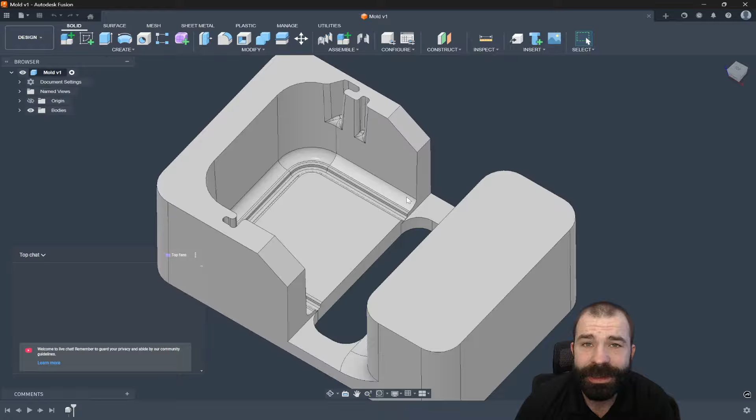The first request has come through from one of our common viewers: how would you approach some of the deep pockets on a part like this? Obviously the easiest way to approach these parts is, one, don't take jobs like this. However, if you do take a job like this, this is why we're here, guys.

I'm going to jump over to my manufacture workspace. We're going to throw in our setup as always - I'm going to do milling. From there you can see we have our lovely block. As you guys know, we always like to go with a fixed size block here when manufacturing something, with a little offset from the top. It's looking like this material is super close to size here.

We might actually make that a little thicker as well - let's say it's coming out of a 1.25 inch block, right? We need to remove the mm because we are working in inch, not millimeters, I assume. And then let's get some roughing tool paths on our part.

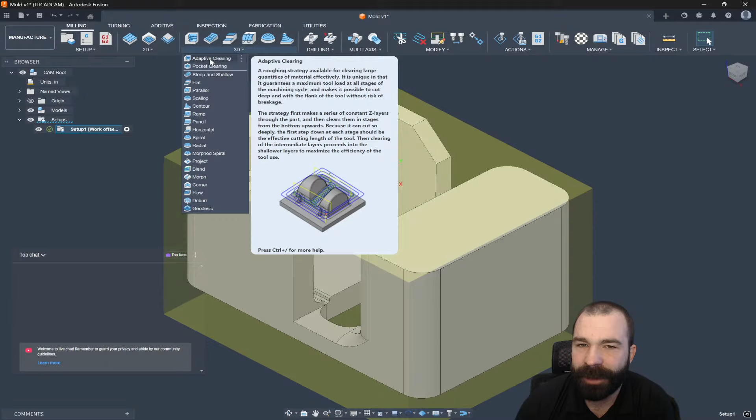If you guys haven't caught our content before, we usually want to always go for 3D roughing. So I'm going to do the smart thing, which I fail to do in most cases - I need a size of something to get an idea of scale. As you can see, that's a 300 radius. We might want to start out with pocket clearing in something like a 1-inch insert mill.

Now I don't have a 1-inch insert mill by default, but I do have a 1-inch bull end mill that can do quite a bit of damage. So let's grab our bull end mill. As you can see, that's actually a little giant now, so again, perspective-wise I'm way off today.

Let's step that down - let's go back into our default library, back to a bull end mill at a 1/2 inch. And for those of you that have never seen this before, we could pick speeds and feeds on the fly.

I'm going to go ahead and call this aluminum roughing. Then we can get our slotting information. As always, we have a maximum roughing step down. Probably want to be a little less than that, a little more friendly on the tool. And what we're really looking for is to be able to rough out our part.

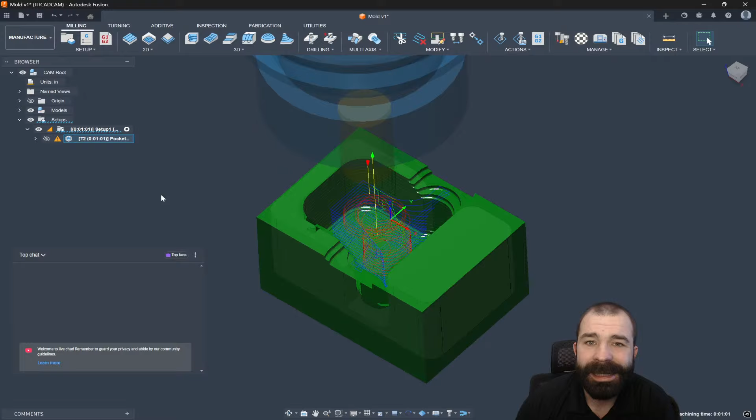If you've never seen my content, I'm a true believer of hitting the OK button, getting blue lines on the part, and then determining what is wrong with those blue lines. Just so happens in this case, we go to our geometry tab. The problem is our tool needs to have no boundary so that the tool starts all the way outside of our part and works its way in, just as you guys can see.

Now we are getting a couple of things here, and I'm glad we actually got this part in this tool size. As you guys can see, this gap is too small for that tool to fit through. If I measure this flat to flat here, it's a 460 gap between those two. So that 1/2 inch tool just is not going to clear through there.

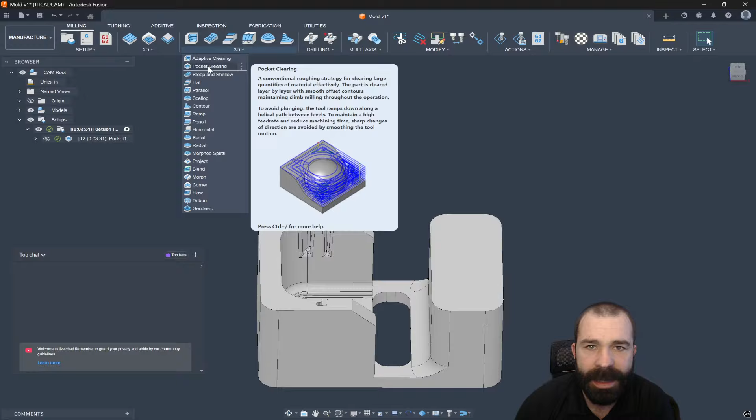This is where I might approach now bringing in a secondary toolpath. Maybe it's adaptive clearing, maybe it's pocket clearing. But what I'm looking to do is step down my cutter size. Let's get down into like a 3/8. Again, I'm going to stick with the bull end mill. And where's my 3/8 cutter? From that 3/8 cutter, we're going to have our rest machining utilized to our advantage.

This is what I'm going to show you guys here in a second, when you're stepping down in tools and using rest machining. Go ahead and change my optimal load. We are doing adaptive. Let's do this the smart way, guys. We're going to go ahead and do reset user default. There we go. So it looks like when I derived it, it pulled through a speed and feed I didn't need, but we're going to let this calculate out.

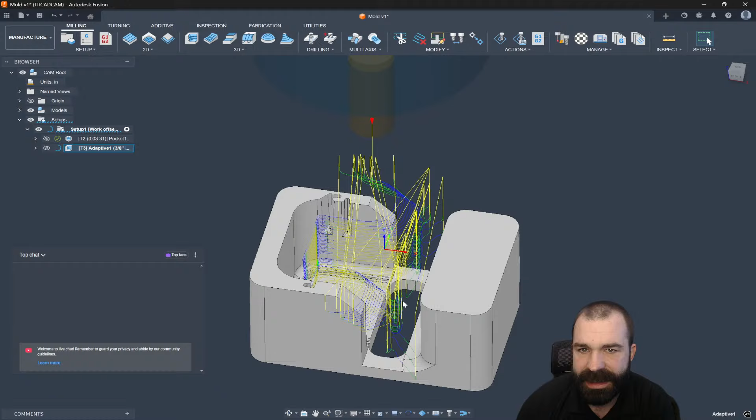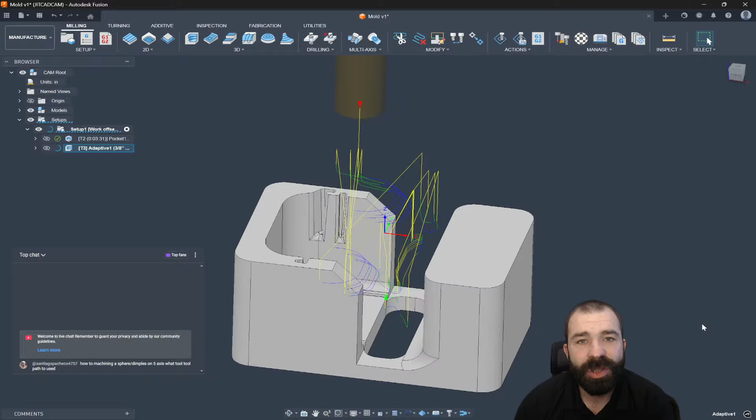Now you're going to see we're probably going to get a ton of extra passes that we necessarily did not want. The reason for that can be based on our continuous rest machining. Again, ignore stock less than - this is important. I always like to make this number larger than whatever my stock to leave is prior to. My stock to leave is usually based on a 20 thou stock to leave scenario. I'm going 0.025 there, and as you guys are seeing, we're seeing a little bit of reduction in toolpath. We're also jumping back and forth across the part quite a bit.

But I do see our first question coming in. Santiago says, how to machine a sphere/dimple on a 5-axis? What tool and toolpath is used? So what I'll need on your end, can you send me, in theory, a dimpled part? And then from there, I would be happy to apply toolpaths. If you need me to, I can always create one. But I want to prospectively see what it is you're trying to do, because before I show it, I could just drill them, use a drill toolpath and a ball end mill if need be.

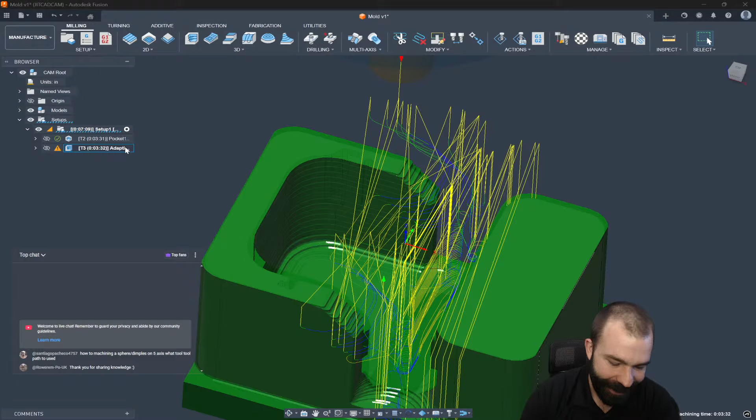Now you can see I can see my stock a little bit better, and there could be more stuff that I need to do. The reason why I'm taking a lot of you down this path is because at some point, I'm either going to finish my walls with a bigger tool, then I'm going to start to worry about getting into these smaller pockets. Now I'm going to cheat the system a little bit, we're going to kind of look at doing some of these pockets. So I'm going to inspect this. As you guys can see, we're getting a loop length.

Again, there's probably taper on this part. I don't know where this part comes from. So I'm going to go ahead and grab the edge. And now we're dealing with a 20 thou radius or a 0.041 diameter.

Now, this is where things get extremely tricky, extremely quick, but it still always kind of comes back to the same thing. If I come in here using pocket clearing, I'm going to go down to a really tiny tool. I don't think I have anything that small off the top of my head. Let's go into our cutter here. The real problem we're going to face is dealing with a very small tool in a very small area.

Let's say 0.03125, and we have a 5 thou corner radius. Again, a tiny tool, and that tiny tool is what we're going to use to get our tool path on our part.

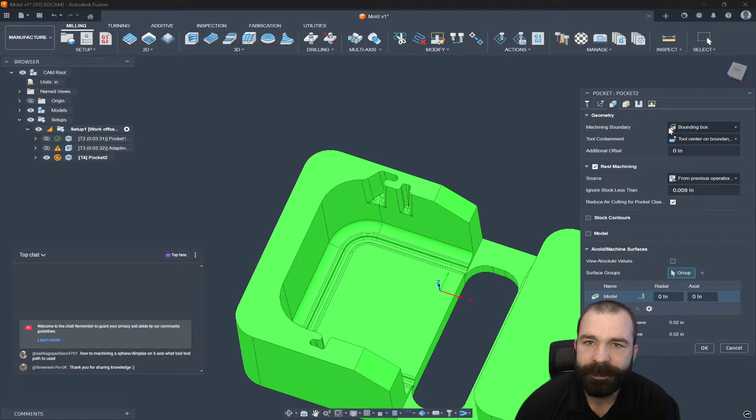And now what I am going to do on this one is select the boundary, because I'd like the tool path to only stay within a certain region, right? So again, this is where I'm using that boundary selection. Tool center is fine. Really what I'm looking to do is just get a path to start to show why and how what we were doing, and what's going to happen. But this is where we're going to run into our first dilemma, right?

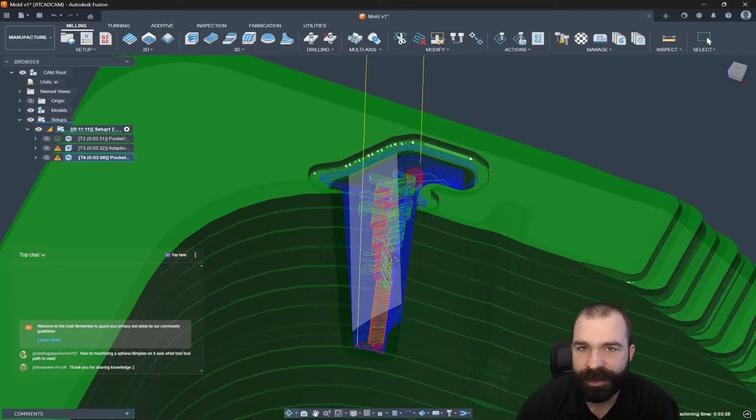So this is a roughing strategy. Again, we have stock to leave currently turned on. However, stock to leave based on 20 thou for a 30 thou tool is unrealistic. So we'll bump that out to about 3 thou. And as you're going to see, we're going to get a much larger tool path, roughing out the inside of that pocket. Now, again, I haven't rest machined a bunch.

I didn't get a lot of tool paths on this to get it down to a finished position. That's why you're seeing that we're kind of starting outside the part. The boundaries look a little weird for the roughing. But as you guys can see, I am now roughing out a very, very large pocket. That was my end goal at the end of the day.

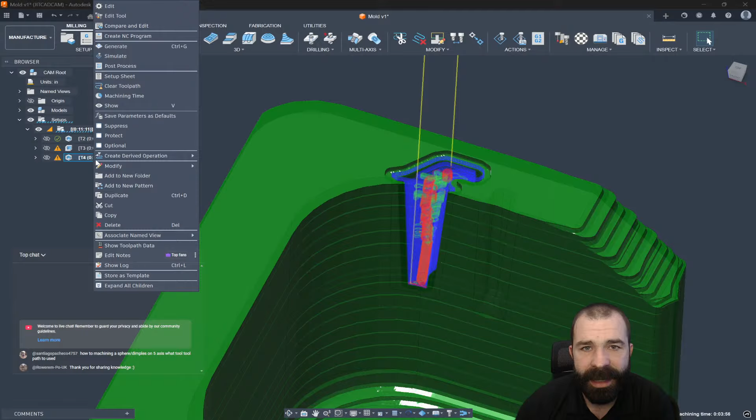And since I have that, I can now quickly pivot into something like a contour toolpath. So again, if I'm looking to do this with 3D toolpaths, this is a mold, I would highly recommend being in the 3D workspace. But what we're looking for, again, we have a maximum step down, maybe that's going to be smaller based on what we're doing. Again, we don't need stock to leave now because this is a finishing strategy.

The real problem we are going to face at the end of the day on this part is the fact that no matter how hard you try, this tool is going to have to stick out a mile. That's all there is to it, right? So a few tricks now that I'll show you guys is setting up tools for these situations.

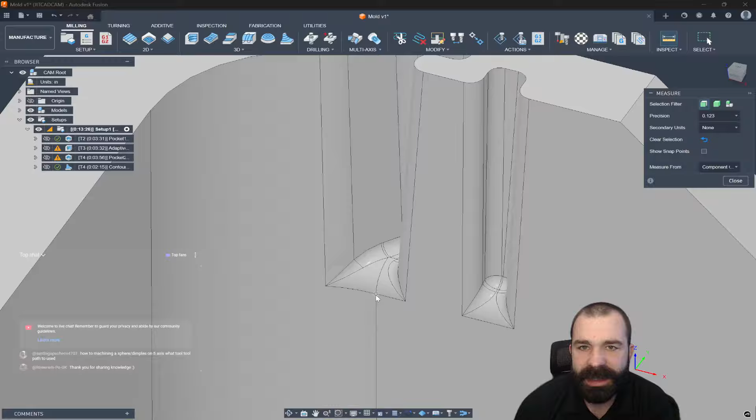So what I'm going to do is start off with an inspect, because I need to know the rough length that I need of a stick out of my tool. So we need to be about a 1/2 inch stick out. Again, guys, I understand that's like a mile of stick out, but let's go in and we're going to edit our tool.

We're going to go to our cutter. And in this case, we're going to say the shoulder length is about 0.5, which means your flute length, if you're using more of a die making tool, is probably only about 50 thou. And as you're seeing here, I still have an overall length of 1.5 inches, which is massive.

We also have our length stick out below holder. This is where I might actually use a reduced shank holder. So again, if I go into shaft, I can add in a couple of segments for that shaft. Again, you have your upper diameter, lower diameter, and we could start to build out our tool.

So for example, I may want this to taper down to a 0.1. And as you guys can see, by adding that information in, I have now created a tapered style holder. Again, I'm going to add a few more here because we do need that to be possibly much larger. We're going to go ahead and actually do 0.5. Let's say we want... trying to come up with numbers off the top of my head, guys. As you guys can see, we can change that up.

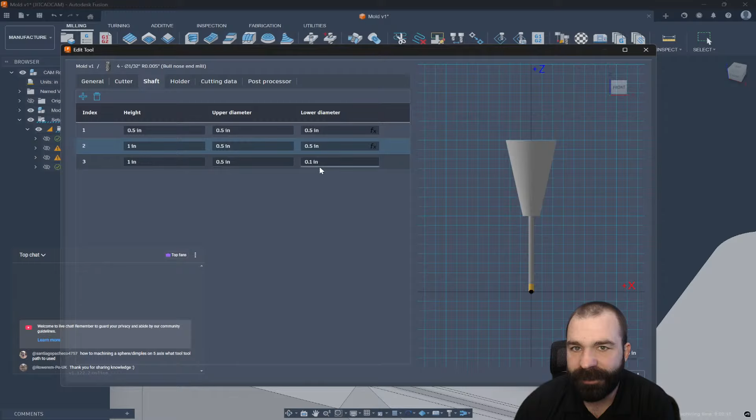Again, we want our upper size here. Let's say it's going to be about 1 inch long. Now, the reason why I'm not getting more information out of this tool yet is because I still need to go back to the side of the cutter. And then we may want to change things like our length below holder to close to 0.75.

And as you see, we have our tool holder. We could also change our tool length as well. Let's get this down to 1 inch. And we actually might have to increase this—it's been a while since I've had to build this out. But as you're seeing, go ahead and delete this guy. As I like to do at the end of the day, sometimes plugging in obnoxious numbers tends to help. As you can see, we also have tool holders that we can grab as well, which we are missing. So let's go ahead and put one on here.

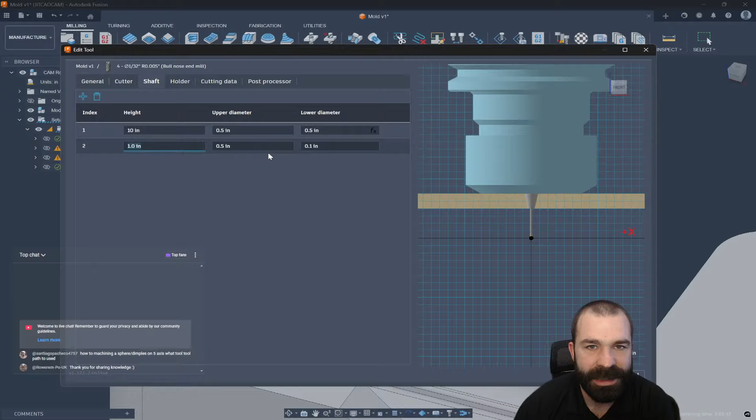But from that, what I'm looking to do is build that shaft out. Again, we have our upper, our lower, length 10 inches, 1 inch here, which for some reason I'm not getting the actual full shaft and holder that I'm looking for. So give me a few more seconds. I think, you know what—now thinking about it, I have to change stick out length, and that is the case. So even the best of us have a little bit of a problem from time to time.

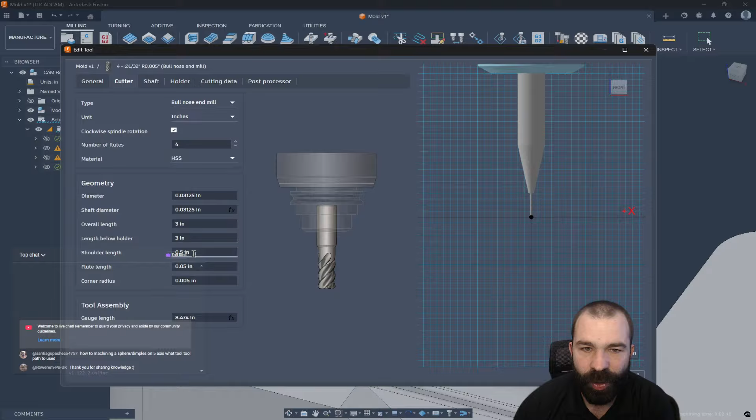So your stick out length does control basically, or your length below holder does control, both that tapered extension. I'm going to go ahead and change my extension a little bit here. Let's get it just a little smaller in diameter. I think we're going to run into problems later regardless. But just like that, we've now created an extended tool with a tapered shank kind of holder, making it a lot more realistic for what you're machining or what you're doing at the end of the day. Again, avoiding those collisions and damaging the tool.

Now give me a sec here, guys. I do see, well, that we can't show on—so I just got a notification from one of my other customers for some support, but it's not an emergency.

So again, what you guys are looking at is getting down in those deep pockets can be a pain, especially with a very long reach stick out tool. This is where you may want to use a couple of tools to get down there. Again, you could break this down by Z heights.

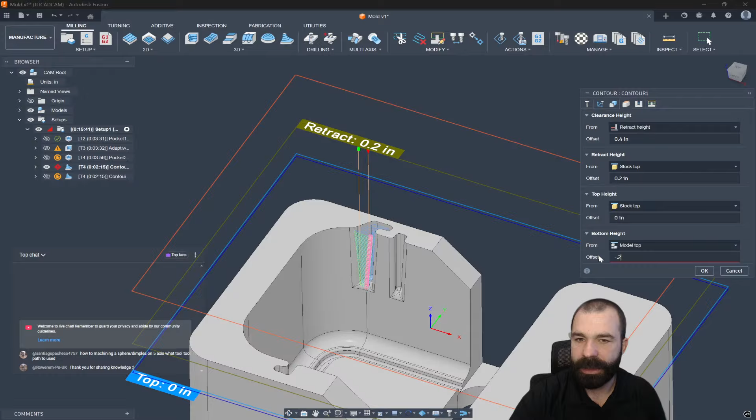So if I was to go in, utilize the same tool path, I'm going to duplicate it. And let's say, for example, I only want to get down to a bottom height. We're going to go ahead and we're going to reference this instead of model bottom—maybe I go model top minus 0.2. And now the first 200 I'm going to do with a different tool. Yes, I didn't select that tool yet, guys, I'm just showing you. The neat thing is we can go through and we can break this down using our Z height control. Again, this is going to be based on model top minus 200.

And then from there, our next little pocket and cavity deeper, and we could also go through and start to add in additional areas. Usually what I tell most people is you want to use the rest machining as much as possible to your advantage. I know I'm just changing out the stock or the finishing toolpath, but the rule still applies, right? So again, I go in, I add an additional pocket here in this case so that we can see more and more areas. Same thing would happen with that lower pocket at the very bottom of our part.

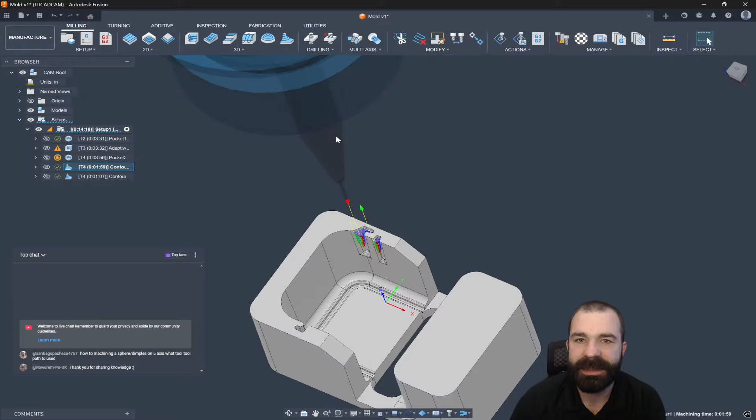This is where having something like an extension or a custom ground kind of tool is going to make all the difference. Because if I was to use this tool right now and do the same thing, I might go for something like steep and shallow. That's up to you guys. Geodesic could be extremely handy down there at the bottom of this pocket as well.

But as you're going to see, let's say we're going to go steep and shallow. And the reason why I say geodesic is geodesic has blend, a little better strategy at the end of the day. So again, we select our boundary to go ahead and grab the edge over here, extend it up, round, and then we want to go inwards. As you guys can see, we're coming all the way around to the other side of our pocket. We're not quite coming all the way down and around, but with a simple addition of a chain, we are now.

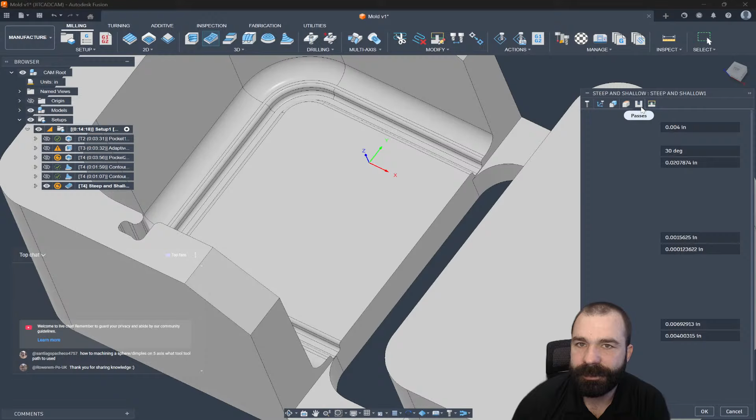Again, utilizing our different settings for step over versus step down, contained inside that area, to be able to machine out something like that. As you're seeing, this is all going to come down to my simulation and what I can and cannot get away with.

Now, we could always up the ante here at some point and look at utilizing - again, what I'm looking to see here, my tool holder is not making contact, but I don't have my stock regenerated yet, which is why you guys are seeing these errors. What I'm really looking for is that stock or tool holder colliding with my final part, if there is any.

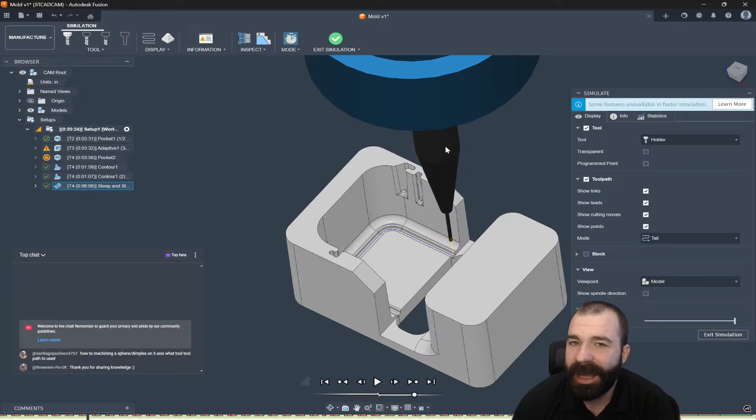But now we could try to start to add in some live 4-axis or 5-axis maneuvers if you have the ability to do it. But as you're seeing in a 3-axis environment, there's no good way to go about it. You're going to have to get some kind of extension in there, and utilize machine simulation as well as clearance checking just to make sure there is no problem.

Again, I'm regenerating some stuff on my side just to see if we can't get that stock model to come through, so that when we go back and simulate our steep and shallow, we're not getting any collision. So what do you guys think?

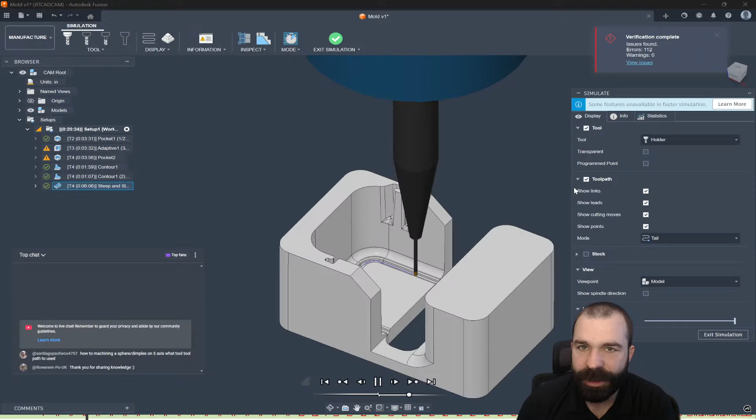Is this something that works for you? Does this kind of explain and show that series of events?

Again, I should have roughed this out, or in this case, as you guys are seeing, I am making a collision between my holder and my stock right now because we never finished up our walls. So again, it doesn't really matter the order at which you do stuff in Fusion, because you can always go back and add new toolpaths and change things up.

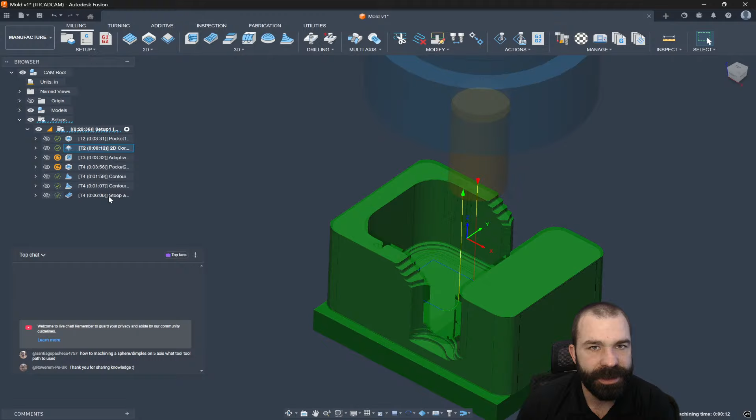So if I came back in here with our half-inch cutter, go ahead and use contour selection around the inside profile here - I'm also taking a chance that this might actually be a vertical wall. And then we're going to reorder that back up to the top, because again, keeping our same tool numbers together if need be, just so we can get good results. And then again, we'll have to recalculate a few things.

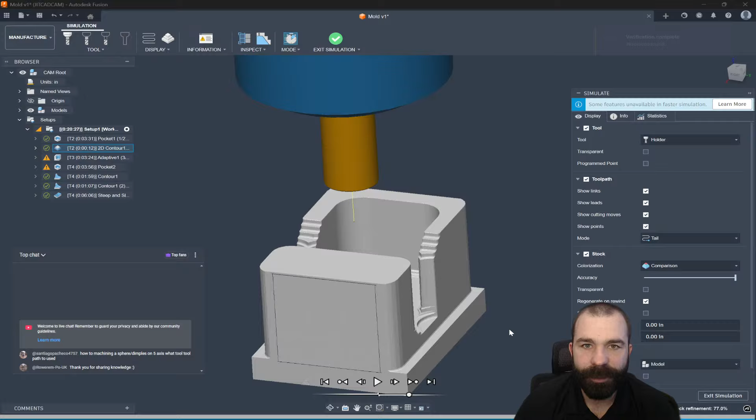Now we could crank our accuracy up, give her one more go. And it looks like those walls are tapered. So I would need to use a little different strategy.

And if that's the case, this is where I might look at utilizing - again, instead of 2D contour inside of there, maybe doing something like 3D contour around the entire part, based on using our biggest tool possible anytime it's possible. And we'll go ahead and say tool all the way to the outside boundary, and get a path on the part and get her reordered.

Again, we'll go ahead and let this calculate out. I'm going to simulate this just to see what we have this time. And we could always go back and add more stuff as we go.

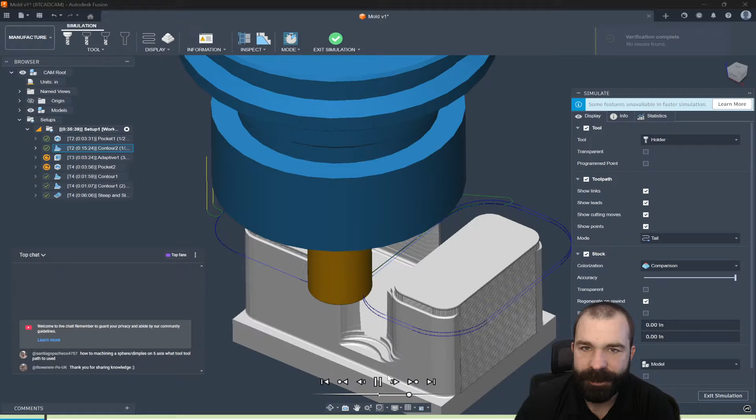Again, what I'm looking for is to knock that 20 thou material out of the way as much as I can - really looking to get the walls machined back to zero. We'll go ahead and pause here real quick so the software can calculate.

What you're seeing here is a heavy step down in our cusp heights, as well as a corner that still requires some cleanup at the end of the day. So again, this is something that's different for each and everybody.

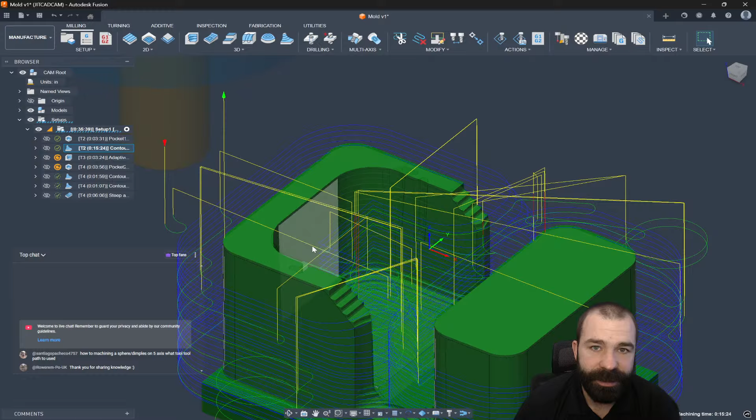If you have the ability to utilize a machine that has 5-axis, this is where we could talk about doing something maybe with swarf throughout these walls here. Again, a lot of different things we could do at the end of the day to make this part much more efficient - 2D contour, maybe we go out.

We could still stay with that ball end mill. I would assume this is like a slide to go in a mold, so the outside walls at the end of the day should have been vertical as far as I know. And again, this is where you pick and choose your battles - if I do 2D contour around the outside of the part, we can use the fast GPU simulation here just to see, is it going to finish up those walls?

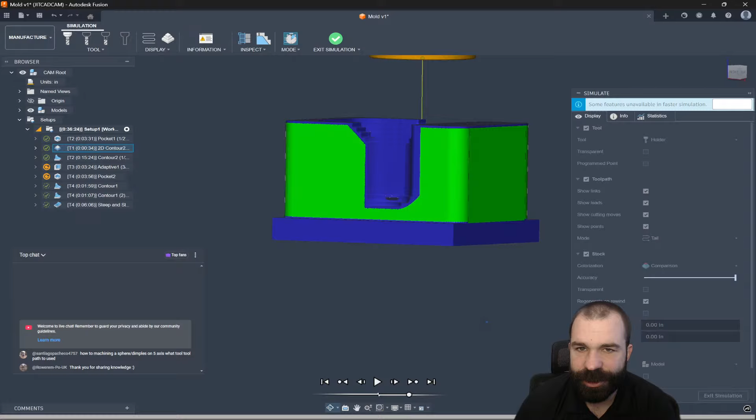Give her a sec here. Wrong tool, but we might get the right results, which is, yes, those walls are all vertical.

So again, we go into our contour. Based on our contour, we could actually use rest machining again, and let it do its thing and self-trim, possibly remove areas that are needed. This is the fun of just about any CAM software—we play that game of, you know, we could actually ignore stock less than a certain value. This is one of those things where we need a number that exceeds the settings in our other toolpaths, meaning you have to account for tolerance in a toolpath as well with those stock to leaves.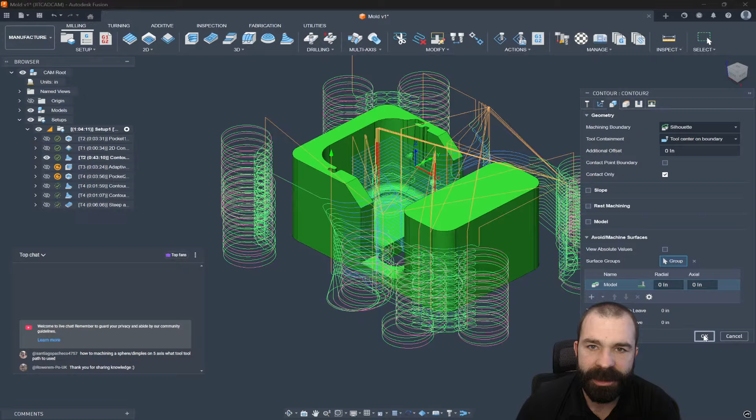As you guys are seeing, we went ahead and made some changes. It still thinks there's material on the outside corners. In this case, we could actually start back at the top where we should have started—we want our tool to be based on a silhouette of our part. Maybe we want the tool to actually start centered on that area. Again, you could see we could reduce down where we're going. So there's lots of little neat tips and tricks.

We need maybe a flat strategy in here as well—3D milling. We're going to go ahead and hit this with flat, clean up our floors and our walls without wasting the time of getting a tool out, maybe a 2-inch shell mill in that case, to clean up anything and everything else. So again, we have our flat strategy to clean up our floors, utilizing contour to get inside there. Just spitballing some ideas.

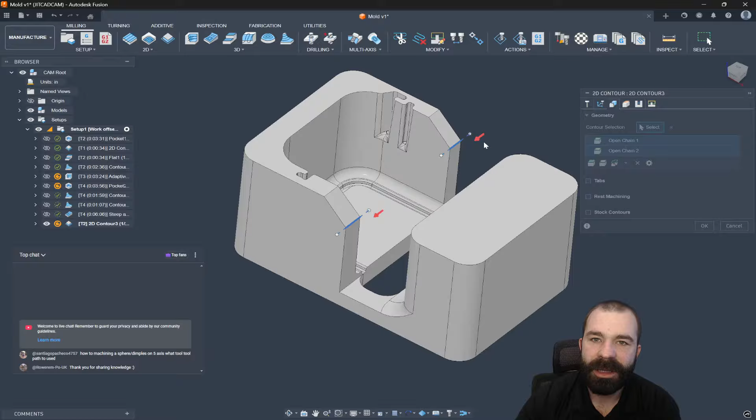We are going to run this part on a 5-axis. We can now go in and utilize something like our tool orientation—Z off of this edge, Z up, and then I could go through and pick these 2 lower rails. Then what I want to do is highlight both of those holding control, right-click align, and give them a little bit of an extension so at the end of the day we're not starting our cut and exiting our cut directly on our part. As you guys can see, just some more stuff added into this as we cycle down and through.

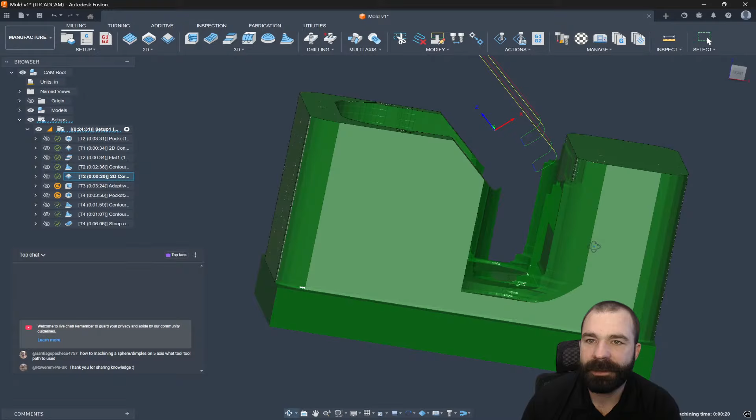Again, this is a ball end mill. I may need to shift my Z—pretty easy to do once I can actually see whatever that toolpath has, or whatever I'm looking to program on that part. Again, making sure I'm not colliding with the backside.

So this is your guys' chance. I'm going to go ahead and check the old ticket system real quick and make sure that nobody has submitted anything else. I don't want to call this early, but I may have to call this early. Looks like my other customer solved their own problem, so we are all good there. Let's go ahead and resolve that ticket.

Any other questions out there? I see you guys, I see you guys out there hanging out. Anybody have anything in particular? Any major problems on their parts? Anything that they want to see?

Again, I'm going to go ahead and start forcing the rest machining to come through. Previous operations, we've trimmed down this toolpath to no longer be doing the stairs up at the top. We're only working around the inside area. We're not quite fully getting through this gap, so I might have to just go smaller, smaller, and smaller.

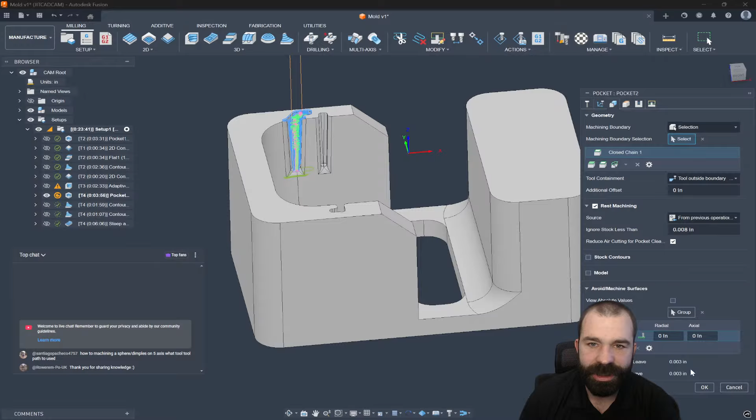However, in this case, when we do the pocket clearing for that little area, I could probably now start to say tool outside a boundary, from previous operations again, and we should actually see that trim down, allowing us to possibly start our tool outside the part. In this case, we're still getting helical entries, and we can extend that even further if need be. So again, this is just a couple of tricks that you can do to start to get that pushed out further.

As you're seeing, we're now going down and waterfalling the entire inside area. But this is why we have neat things like the ability to utilize avoid/machine surfaces if we wanted. You're seeing we're now getting into that other pocket, which is also nice.

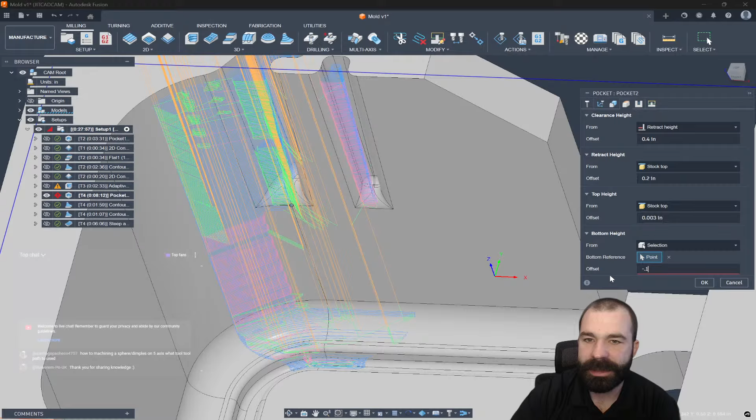So I might just say, don't touch any of this area and don't go deeper than a specific selected area, which would be here. And what you're seeing in the offset world is coming from my tool. So maybe I just want to go 0.10 or 0.01 past that lower area. So now I'm using a combination of different things to force the software not to touch or machine those areas. We still do have contact over here on our wall.

As you guys can see, we're no longer needing helical entries, maybe a little bit depending on where we are down here at the bottom. And we're getting in and out and roughing out those areas.

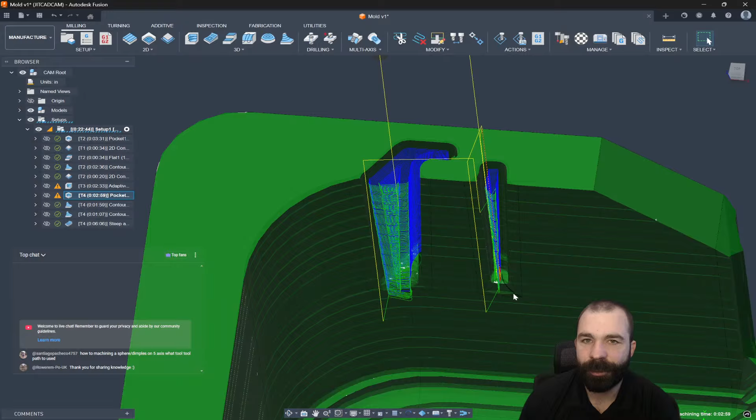Now this pocket here on the right is kind of nice, because in the event that we were looking at doing something with a 4th or 5 axis, this is where we could always come in with a traditional 3+2 mindset. And we'll say contour, for example.

Let's swap our tool out here real quick. I don't know if I have a ball end mill that small. We might have to manipulate a ball end mill. We do have a 1/32. Let's get back up into our normal tooling that we've already built.

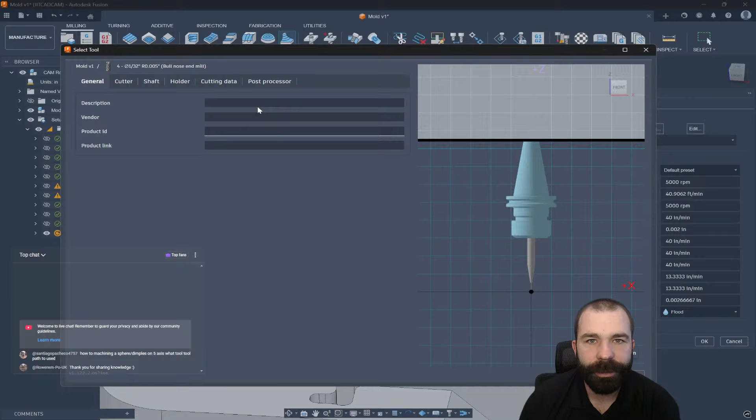And what I'm going to do is take this tool, we're going to go ahead and duplicate it, and then we're going to make it a tool that is a ball end mill, not a bull nose, right? So again, ball end mill, same kind of dimension, same kind of holder for the most part.

But if I'm looking at this part in a certain view, I just used my view cube to cheat here, and I turn on tool orientation, I can actually align to view. Now Z is pointed at me. So wherever my boundary is or selected.

So again, I'm going to go ahead and grab my boundary here, and tool center on boundary, yada yada yada, tool step down. Let's go ahead and go like 10 thou. But as you're seeing, I'm now angular running up and down that face, and I'm doing that based on nothing more than a tool orientation. So going to a fixed position and then still running in a 3-axis kind of environment.

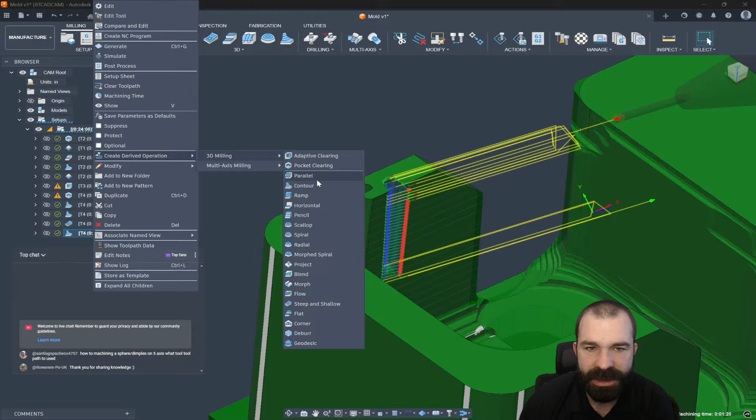Now you could do much more with this. If I was to actually convert this over into our steep and shallow toolpath, again you would need the machining extension you should buy from us over at ITCADCAM. But as you're going to see, we could now bump over to 5-axis.

Again, this is going to be full 5-axis simultaneous. We do have the ability to change our primary mode. We don't want to be vertical, we want to lead and lean this tool, again getting further and further down. Lead and lean basically means we are going to be perpendicular to the surface.

Now I can do additional things: tool axis limit, don't go past 90 degrees, machine at tilt limit, collision avoidance if you guys need it. Again, the idea here is to be able to utilize different tool paths and get different results based on what you can and cannot get away with.

So again, I might go steep only, step down 100 thou, and let's see what we get. This might be a good one for a scallop kind of tool path. And as you guys are seeing, we are getting a collision because we didn't have collision avoidance on. And because we're trying to stay perpendicular to the surface, this is where you have a lot of different settings inside of Fusion.

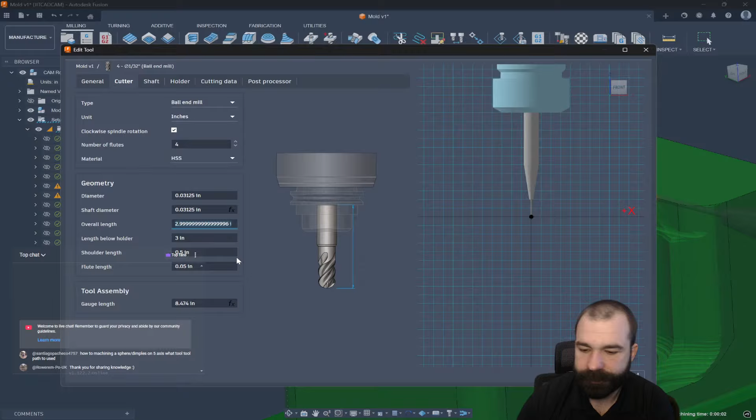However, when you start to stub up your tool a little bit, let me actually back up here because I need to change, not this guy. We need to say shaft and holder, overall length. Actually we might have to change our overall length and everything. Again, should be able to shrink that up a little bit, get it back inside the holder.

I think what we're looking for is, there it is, I was thinking correct. The shoulder length is what's getting us more than anything. So now we've shrank up to 300 stick out from the extension.

Let's go ahead and swap out our 5-axis back to what I would consider utilizing vertical, which means it's going to automatically tilt once it can no longer reach whatever it needs to reach, putting us into a 5-axis motion if need be. Now the problem is because we're pointed at this angle, it thinks it can reach everything.

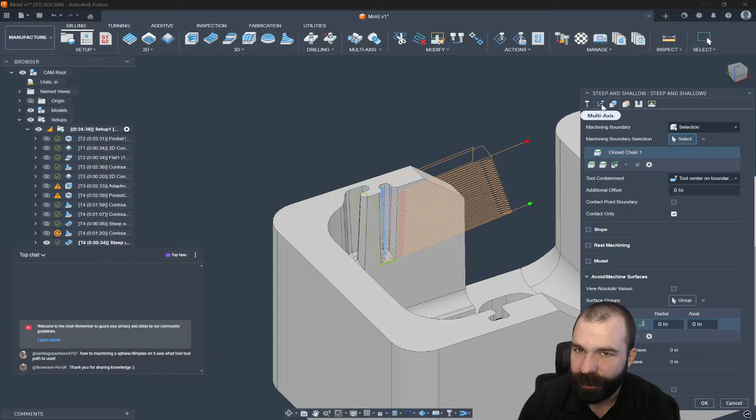But if we turn off tool orientation and then come back and run it again, at some point we will start to tilt in and out of that tool so that we can actually machine those areas. So I'm going to look at tool axis. As you guys see, the tool axis is still, for the most part, primarily vertical. But this is all based on the length of my tool and how I can reach.

Again, open to you guys, the floor is all yours. If you guys have any questions, any problems with that.

I'm going to go ahead and check my emails here real quick because it looks like Autodesk emailed me about something cool going on. Let's see here. Okay, that didn't really work very well for me.

Well guys, any other questions? I'm going to shift gears here in a minute if I don't see any more Fusion-related questions, because I know a lot of people have been bugging us and sending us messages on our website about our Oh Scrap shop management tool. So I think this is the time where I'm going to pivot over to the Oh Scrap tool.

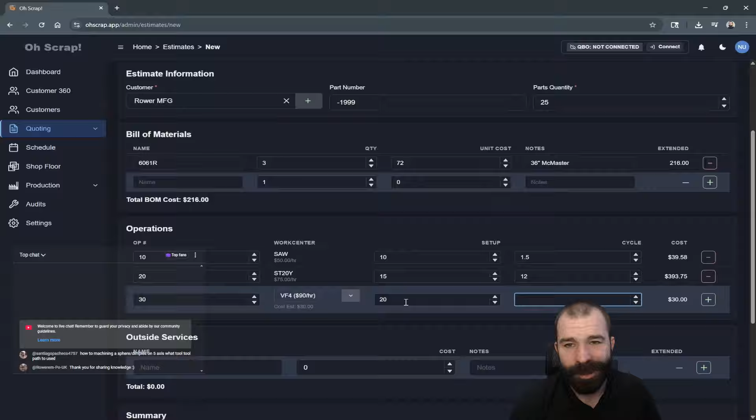Again, once we're done there, we'll throw it over to the VF4. Maybe it's going to take closer to 20 minutes setup. Now, when you're estimating setup, I don't know about you guys, I always used to estimate based on that there is nothing on the table, as if you got to put in vices and tram them up and everything. Again, we're going to say maybe it's a 15-minute cycle. Who knows, right? Whatever your information is, that is what we're plugging in here and rolling up the total costing.

To your customer. So again, the nice thing is if you will still manually want to go back to your customer and say something like, hey, to do 25 pieces, it's going to cost roughly $50 a piece, you have that freedom. But we're still going to want to save our estimate, because we're going to take this estimate, and like I said, the idea is you would have a lot of parts estimated to a customer, which means we can now come back by those line items.

As you guys are seeing, I'm building out that quote. Maybe you know the due date, maybe you don't, we're going to go ahead and push this out to the 28th. And then I can actually pull in those different estimated line items. As you're seeing here, this is where we are building out our formal kind of quote to deliver to the customer.

So again, just like that, we've pulled our quote item in. We could attach our documents, files, things like that if you want, and we could save that quote. Now, you could have more than one line item here, guys, don't get too caught up in the fact that I'm only doing one, but we're going to go ahead and now mark it as sent.

Of course, we could have exported a PDF, as you guys see here. Again, we can customize these PDFs, it's not a big deal, company letterhead, or we could push it over to QuickBooks to be sent.

Now your customer comes back and says they're going to accept your quote, and they want to go ahead and convert our now estimated part onto our job board. This walks us into what we like to call our customer 360, an overview of all the estimates and quotes you've sent out, their status, and what we refer to as work orders. An estimated part turns into a work order, and on a work order you have operations, which all roll back to our quote for tracking.

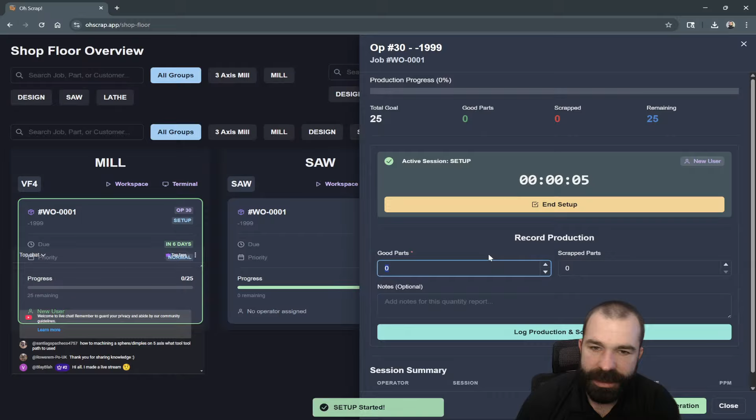Starting my setup. Jumping back over to my job one more time. We don't need to claim any parts yet. We're going to end setup. And then lastly, we're going to go in and start our run cycle.

So this is kind of the breakdown of a normal workflow across what we call Oh Scrap. Again, our main focus is we are trying to help you guys that are spreadsheet warriors, that are trying to change anything and everything, as you guys are seeing.

Oh, we got to go ahead and go back. We're clocked in. We're now in the run cycle. Let's go ahead and pause. Let's not pause. Let's claim our parts. Pause our run. Lastly, as you guys can see, nothing has come off the job board yet because we still need to go in and complete our operation. But that's it. We just want to give you guys better visibility into where things are, what needs to be done, where it's sitting in the process, and maybe, just maybe, if I go back, we will have the ability built out here to give you guys reporting.

Again, employee efficiency. I know that's something that everybody hates, but since the time is now logged, we could actually pull that out to even look at, is your shop being proficient? Are your actual parts ready to be shipped out? Again, this is all stuff built in, automating the system, making it easier for you guys.

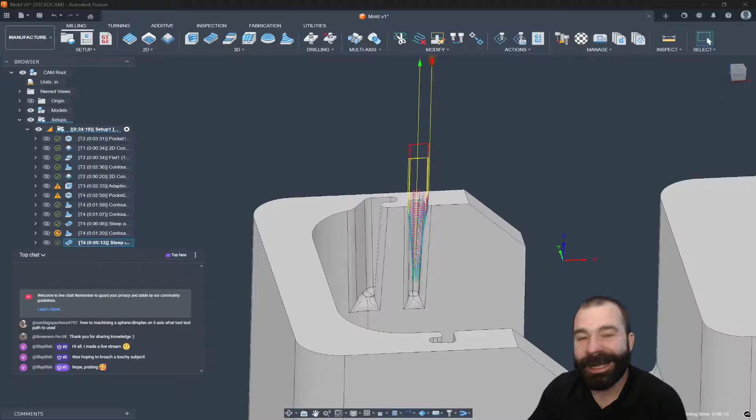Probing. Broach or probing? What is that looking for?

Dog 3D printing. When you start a new sketch, it goes to the origin, even if it's far away. Can you change that? So what you're talking about is if I was right here and I click sketch and pick my plane, the fact that the origin is in place, or it automatically zooms you in, zooms you out.

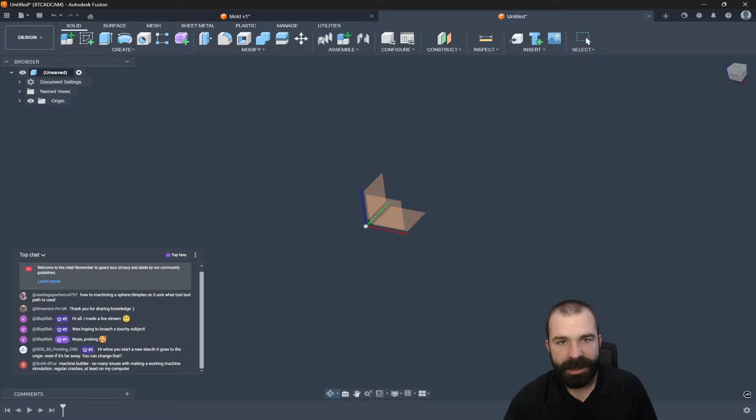When you start on a part that's always away from the origin, I need a little more information. Start on a part. Oh, okay. You want to move your part to the origin. That's what you're going for. I see, okay. Okay, give me one sec.

Let me go ahead and whip out a real quick and easy part here. I'm going to turn my layout grid off before I lose my mind. But let's say, for example, I have a part sitting over here in space, right? Again, example purposes. Now, it's not near the origin, which isn't the biggest deal out there, but you can have the ability to do something like a move command.

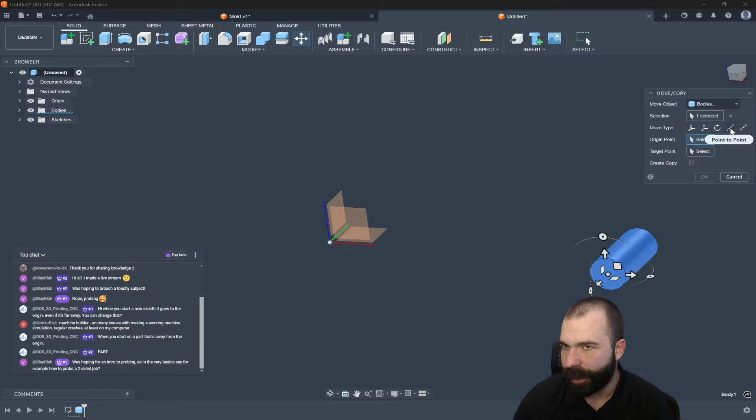As you guys can see, you have the option component, body, etc, and I can pick on my part. But a lot of people don't realize in the move area, you have things like point to point. So if I wanted to, I could grab the center of the sphere here, or center of the circle, and go over to my origin. The move command in most cases works quite well to get your part where it needs to be.

Now you can get much more fancy than this if you need. I'm going to undo this. You have the ability to do joints if you're working in components. You also have the ability to do constrained components. As you can see, I don't have a component in this design, so I'm going to do the hasty thing of converting my body to a component.

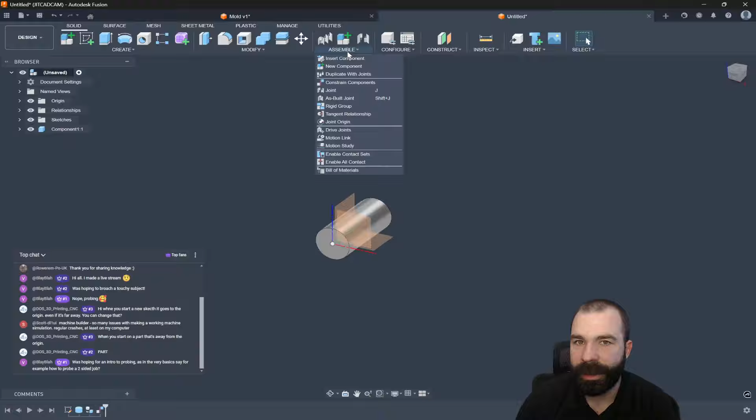Now I could go in and use something like constrain components. So again, I'm going to go center of here to origin. Constraint component is nice because it's not a joint, and there's been a shift in this for you guys. Joints are good for motion. Constraint components are good for aligning things, because you have three-face alignment and a lot of other things that work out very, very well. It also fixes them in place so you don't have to deal with things moving around.

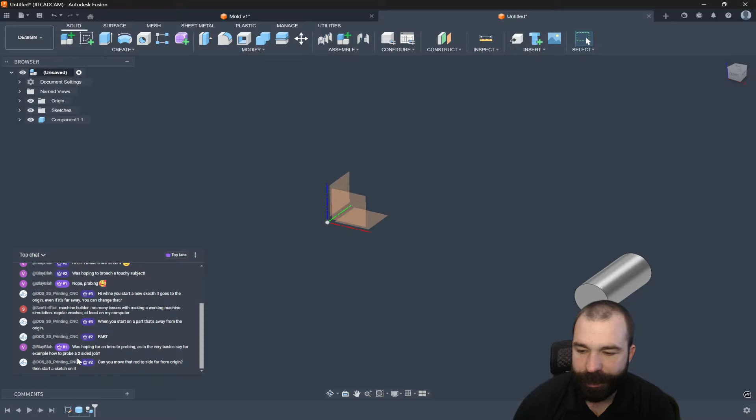If I start a sketch and pick the top surface, you're saying it now fits you to screen. Yep, so what you're seeing is the fit screen maneuver happening. Let me back this up one more time. Let's say I turn off my origin just to make sure it does that, and I pick the top surface. It's trying to automatically fit the screen, center the origin, and then scale me in. By fit, I mean down here on your toolbar, in the zoom window, fit is F6.

But I've got to remember here, it's been a hot minute since I've had to do this. If I go up to my preferences, I think there's a preference you can change. We're going to go into general, then design, and auto look at sketch is probably the one you're going to need to turn off.

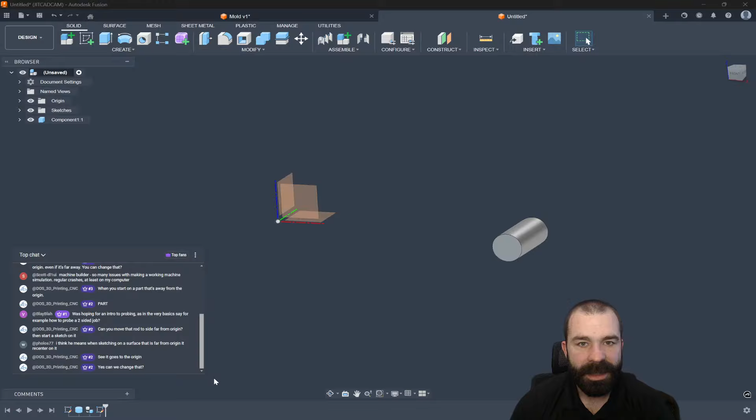As you guys can see, that's where I would start. Again, if I turn off auto look at sketch, we hit apply. Let's try this one more time. I'm going to get the origin on, remove that sketch, do a brand new sketch, and click that. Let's zoom in on it. I click that surface, and I'm no longer auto-orientating and looking at it, bringing that plane into reference. So just by turning off that one setting should fix your issue. There it is, easy enough.

Very rare that I get some of those questions, but since we're talking about design right now, I'm going to point out a few others. Is auto look at sketch, as you guys saw, valuable? Turn it on, turn it off, up to you guys. You also have a few other items in here, like auto hide sketch on feature creation. This is the annoying task where if you create a circle and extrude it, the moment you extrude it, your sketch turns off. You can turn those things off.

Now, one that I would highly recommend, I can't stress this enough, is scale entire sketch at first dimension. Let me show you the difference between these. You guys have this turned off by default. I'm going to turn off the auto hide, and have my scale on. What you're going to see, again, I'm just going to scrap everything in this file and start back at square one.

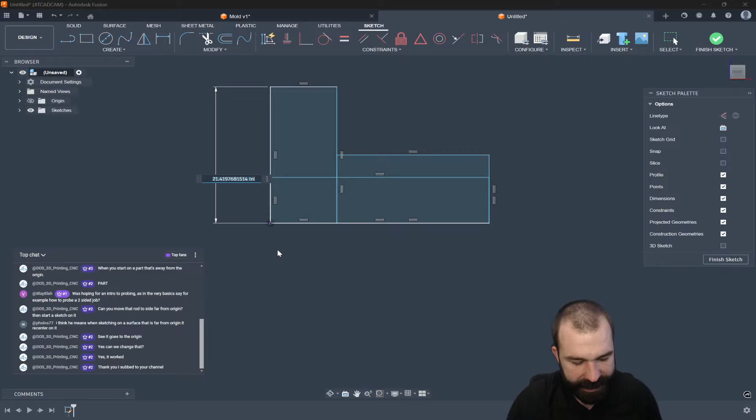Now when I go back and try to dimension this, I'm at 21 inches. But what if I only want that to be a 2-inch OD? So I'm going to say 2 divided by 2, and just like that, the entire thing is scaled down to the size. So I didn't just move a rectangle, I moved all of my rectangles in this case.

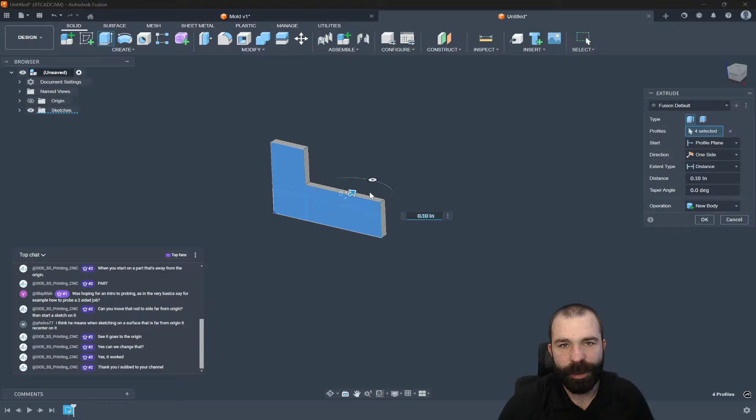Now the second option that I turned off is when I go in and extrude. We wouldn't actually do an extrude here, let's just keep with the idea that we're making a bushing. When I hit OK, you're going to notice my sketch stays on, because I untoggled the auto hide sketch after feature. Now it's still on - this is up to different workflows. There's a lot of reasons why this can be good, and it can be bad. But as you're seeing, I would manually have to go toggle this on the right.

But before I change my settings back, I want to make something clear to you guys. I don't think a lot of people understand that you could actually go to your sketch and you can go down and show dimensions automatically. This is a neat thing, that instead of going back into my sketch to edit things, this is extremely valuable in 3D printing. You could actually show your dimensions and at any time update them in real time. As you're seeing, I just changed my dimension right there and everything else went with it. So if that sketch is off, you don't see the dimensions, but with the sketch on, you have full freedom to be able to edit it on the fly.

Give me a sec guys, I am going to get to some of your other questions now that they're starting to come in. But what I am going to do is turn on my auto hide sketch feature because I will lose my mind. And I like to keep most of my settings as factory stock as possible, because we train you guys - we don't want you guys to open up your Fusion and wonder why I have something and you don't, all because of a little checkbox.

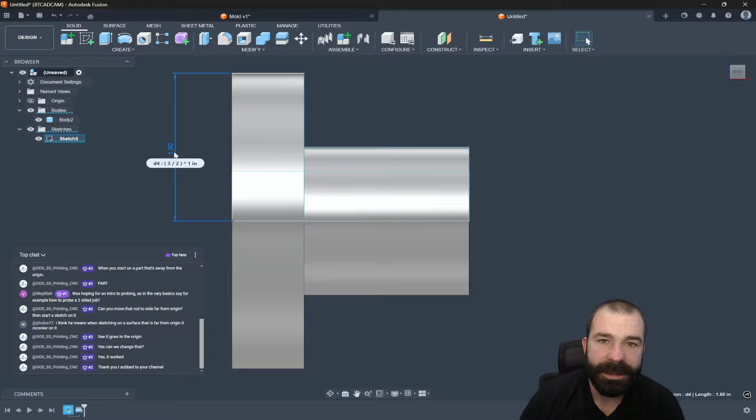Awesome, okay, that's what I was thinking. This part's going to work out for us quite well. So I am going to scrap basically everything in here. We're just gonna rip this from the beginning and do this right. And that's going to require starting on the back side of this part - it would be much wiser.

Now, as I've already got my stock set up, if you guys missed this, I'm gonna go back and show you real quick. We have our Z-axis faced up. I am going off of my stock right here, very top. Now that is where I am also going to probe here in a moment, but I'm going to show you a couple of probing tips that I think a lot of people don't know about.

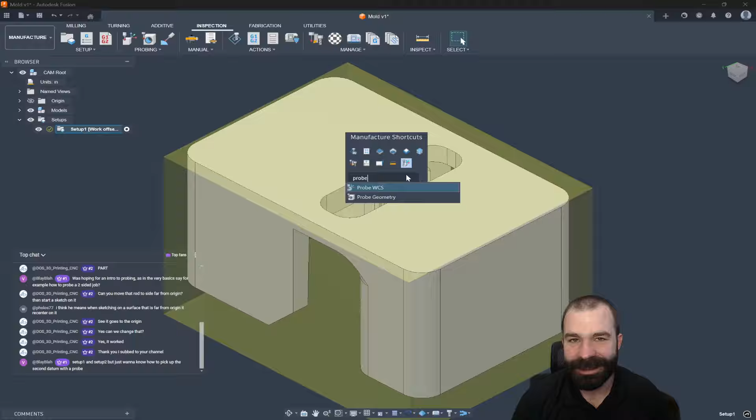First and foremost, I know why probe WCS is in this window, because as we teach you top to bottom, right? You create the setup, then you're probably going to probe it. I have the great habit of going over to inspection and probing WCS, but guys, it gets better - you could also hit S on your keyboard and map your own shortcuts like probe WCS. I'm going to pin this to my toolbar now, so in the future I should hit S and do probe WCS. So I'm going to go ahead and grab my probe.

I believe I do have a probe in here somewhere. Let's go ahead and expand out my cloud library - good old-fashioned Renishaw 6mm probe. Now, a lot of people confuse the fact that when I want to go in and probe, I'm going to probe my stock. But it doesn't matter, and I'll show you this. I'm going to pick the top surface. I do not need my work coordinate system to be in the same center as where I'm probing right now.

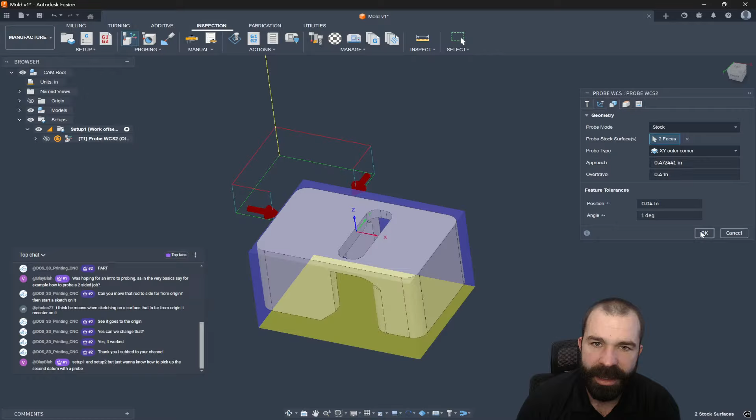So what I could do if I wanted to is I could actually probe this corner based on those two surfaces, and Fusion is going to do all of the math to where that WCS should sit in the middle of my part. I just want to make you guys clear of that. But as you're seeing, there would be a corner probing procedure, and then from that I'm going to go ahead and add in a Z-axis probe. It's not necessarily needed, and we're not going to go off model - we're going to do this off stock again.

There's my stock. We're going to change out to a Z surface instead. And as you guys can see, I'm currently probing exactly in the center. You can change this up - again, we go to geometry. I have the ability to choose either a face, Z surface, and you could also change where that location is. But that's basically picking up setup 1, right?

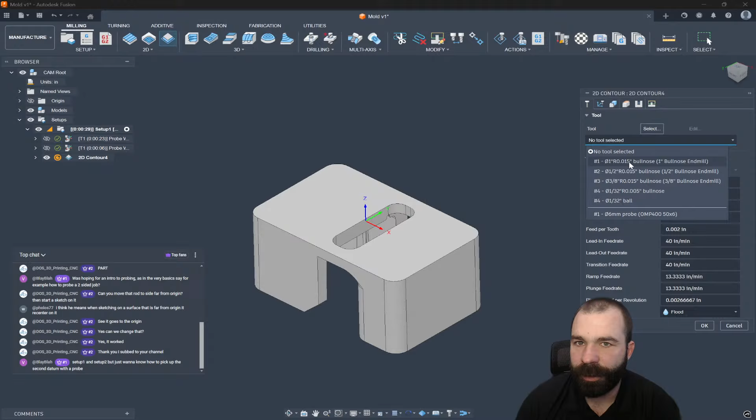Now, let's say for example I am going to apply a toolpath to this. We're going to go ahead and 2D contour this all the way to model bottom. And we're going to go past, I don't know, right? As you're seeing me do, I'm going to go ahead and grab a tool - I think we have that big 1-inch cutter in there, I think this is going to work quite well for us. And I'm also going to turn off my tool axis because we are just 3-axis machining.

So let's just say I'm done with this part. I need to flip it over and then I need to do something in setup 2 now. So again, I rinse and repeat - I create a new setup. As you guys are going to see, in this case, I got lucky with my Z-axis pointed up.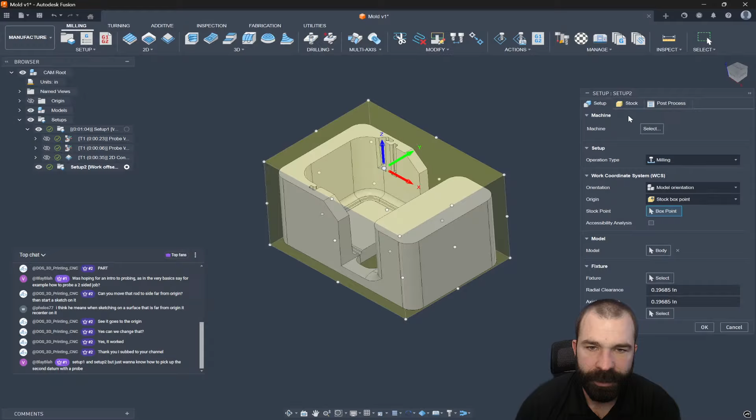We would walk through that same process all over again. Now, something important here, and I cannot stress this enough, is this checkbox for continuous rest machining. You need to check this. I highly recommend clicking the 3 little dots, saving as user default, and hitting OK, because now that hat is there for me to utilize and continue my machining process.

Now, the location of your WCS is a whole nother debate. Me personally, since I have a flat part, I would probably go off my model box point. Again, this is probably extreme laziness if you ask my wife, or proficiency, since I'm the master. As you can see, I can go off the bottom back left corner.

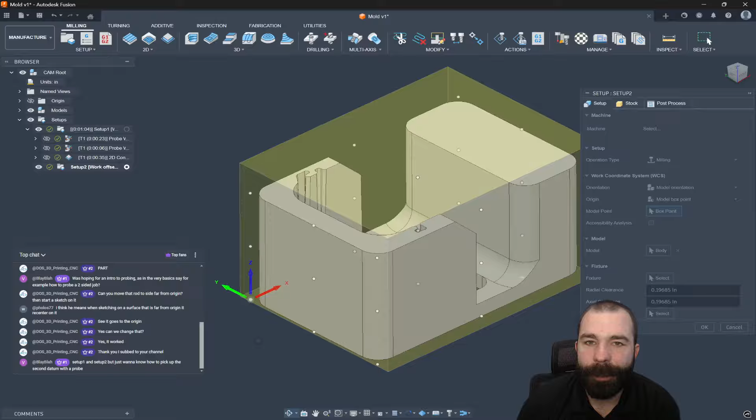What does that mean? Well, I can now probe my jaw face. I could probe maybe the top of your parallel, or if you have just soft jaws with a step in it. And then if I'm utilizing something like a machine stop to hold this in that back left corner, I could just put a placeholder of a 1-2-3 block in my machine, probe back left corner, top of that 1-2-3 block, and then lower into that corner.

But the trick here is once you get it set for your first part, if I was to go in and face this guy off, we're going to go ahead and do some multiple depths here. Now that I've decked off my part, this is when I would probably probe my second operation.

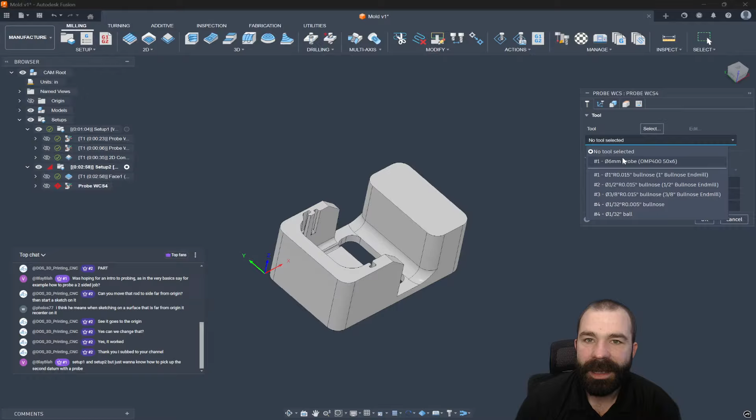So again, we hit the S key because we pinned probe WCS to the old keyboard. I grab my probing system, and then with that we're going to go ahead and pick up maybe again this corner. As you guys can see, that is where I want to set my XYZ from.

And if you wanted to, once again, you can right click here and go in, I think you can do a new operation. I never do it this way. New operation - this sucks. Don't do this, guys. Do not do what yours truly is trying to show you right now. This is a terrible workflow. But, probe WCS one more time.

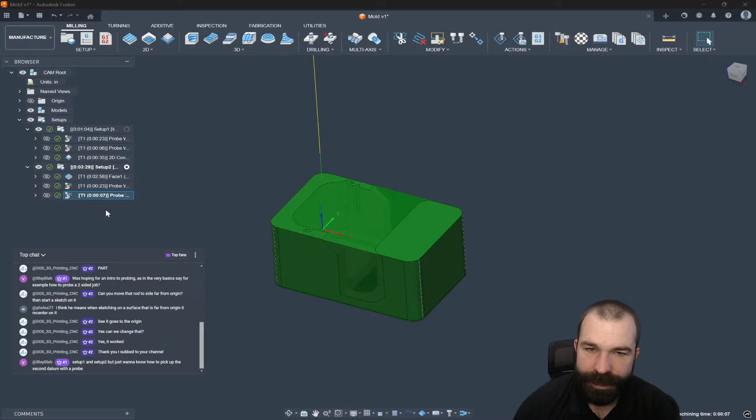And we're going to go off the top of the model here. Again, we can drag that point around to get it to wherever we want. And just like that, I'm using the ability to deck off my part to get down to my machined surfaces and then possibly pick up these 2 areas. Now keep in mind, I don't need to probe Z because we've already done that when we did our first setup. We deck our first part, you measure it, adjust your machine a little bit, and then you don't really have to worry about it as long as your fixturing will take it.

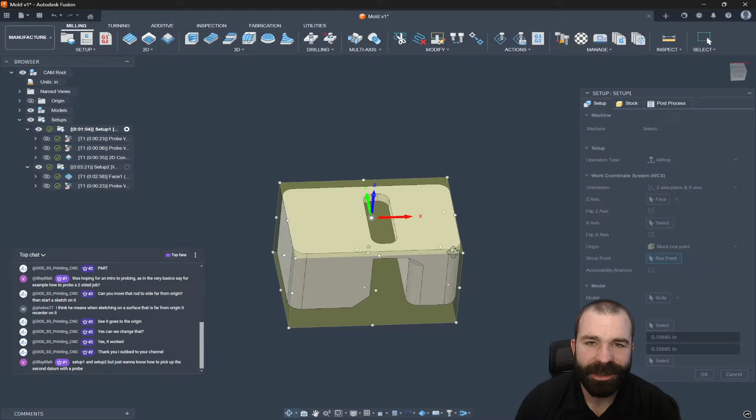But this is just a way that I would look at doing it, and I think it would be extremely beneficial. Again, I try to be as lazy and proficient as possible, which now thinking about it, we go back to my first setup - I should actually use that same exact location on my first setup. I could use the same work offset for setup 1 as setup 2, and I don't have to move it, and it's kind of a known position in my machine.

So let me know, does that work for you? Is that a good understanding of how it's going to work for you? Let me know in chat. Anybody else has any questions at any time? I'm here for you guys.

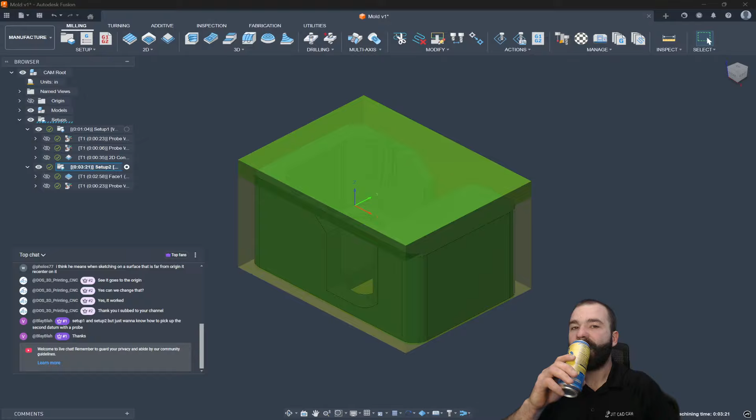Awkward silence. Oh, circular reference. Ah, okay. Insert component into machine builder.

Scott, I'm gonna take a step back here, man. I don't want you to think I'm picking on you. If you are getting circular reference, I'm trying to think that error out at the top, is usually what's happening is you've gotten stuck in some type of loop. And oh, this is gonna be a tricky one. If you could give me a real quick bullet point in chat of what you're doing to get that, I think I can recreate it because I think I know what you're talking about.

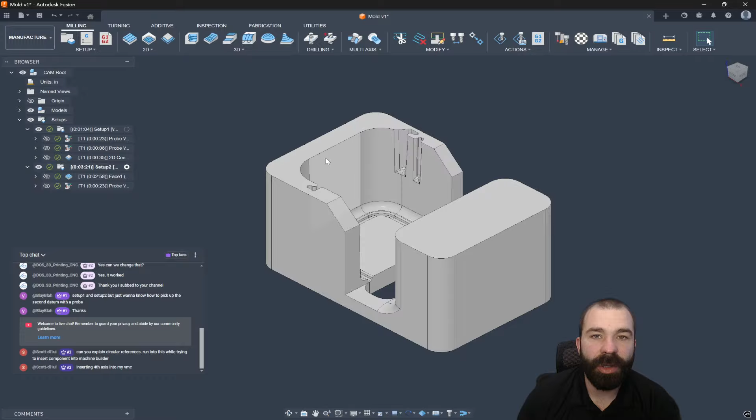So this is a machine that is coming inside of Fusion by standard. As you guys can see, it's already built out. But if I wanted to insert something in this, for example, this lovely little block, and insert this into my current design, that great little block is now sitting on my table. However, one thing I would need to do is break the link on that, and this actually makes it so that your machine builder is now separated and doesn't have that problem.

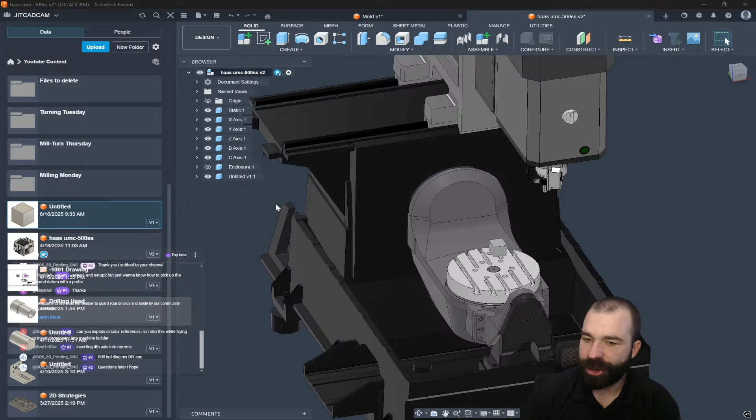Now, I'm assuming, Scott, is you've now inserted your rotary, which that shouldn't have been the problem. I think the problem you're referring to, correct me if I'm wrong, is when you try to go select and reuse that machine inside of Fusion, it tells you that it's already associated, right?

Awesome. DOS is building a 3D, or he's building his own DIY CNC. Love to hear it. Love to see it, guys.

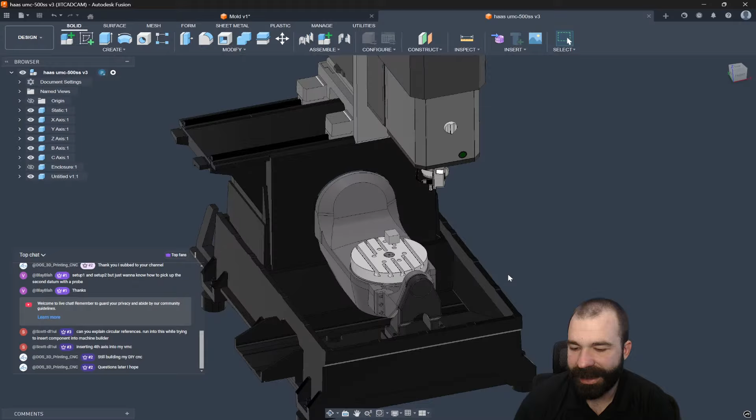Great time out there. But basically what has happened is we've manipulated this part in some way, shape, or form. Let's say, for example, I was going to use it on this machine. Oh, man, I don't even know where that machine lives. We've also just absolutely butchered it. That's not the... Now the fun is going to be trying to find it and pull it in here.

I'm going to use a different machine, for example, and you guys will see why this works. So basically, once you bring your machine in, again, there's my part. This is upside down. Don't worry, we'll fix it here in a minute. Boom. Okay, so there's my part. I actually went completely the wrong way, so let's go back. We don't need to be negative. Positive.

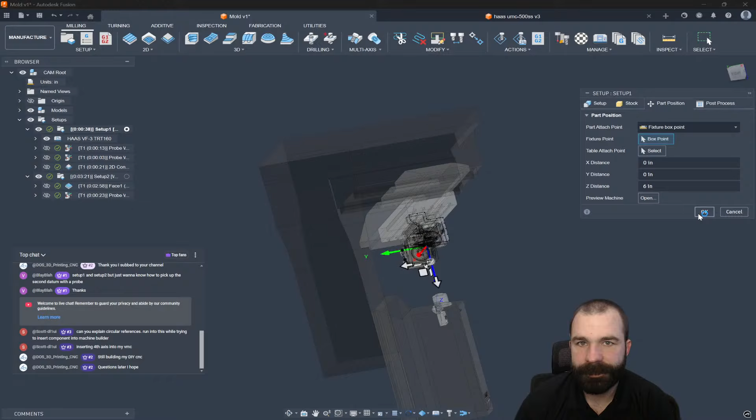Maybe I'm crazy. Hold on here. Yeah, we need to... Maybe I broke something already. Pretty standard for me to break stuff. Yep, I broke stuff. We're gonna go back. We're gonna go back. Drag this through the other way. We will fix this later. Oh, I'm crazy.

Yours truly is having nothing but the best of times, right?

Why you don't use machines that you've butchered inside of Fusion. There we go. All right, you know what? Let's just take a look here. We're all upside down now. Reactivate this. Take this. Be able to show our machine, which is not coming through because I don't think we have our base. Okay, let's just simulate this with the machine and see if I can make this work. If not, I'm going to go grab another machine. Hey, it's in the right spot.

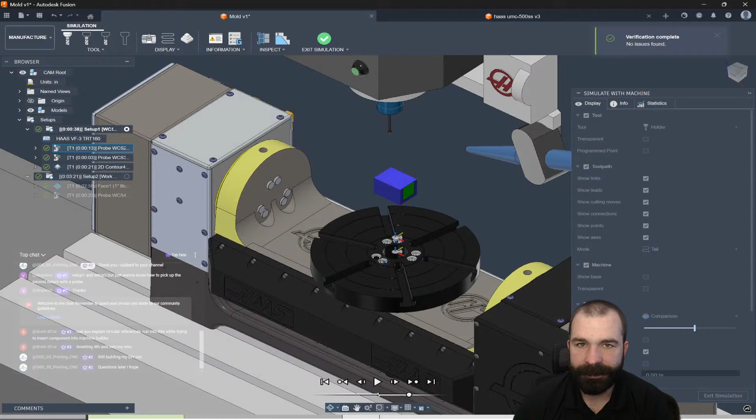Messing with me. Okay, so what happens is you guys have inserted the machine into doing something, and then you realized you had to change the machine. In this case, good example, added that rotary axis. Now, what I highly recommend is if you do something like that, one, this is a newer update, you can actually right click and replace machine. This is very, very valuable at the end of the day.

But if you are running stuff like this, and I go through and post process this, and I have NC programs turned on, what will happen, go ahead and post some code here real quick, is you now have a machine tied to a setup, which is also tied to the NC program, and that's all residing inside of your document.

So if I go to my machine library right now and go to document, you can see this machine is linked, but it's all at the document level. This machine right now is different, which a lot of people confuse - this is the one that's in my cloud for everybody to use, and this is one that is locally hosted inside of that individual part.

This is why Autodesk made some changes to the system. If you go in and say replace machine, they now give you this option to go through and select your new machine, whatever it's going to be. We're going to get problems here regardless of what I do, so let's just grab a machine. Then we could say, I want to replace all setups and NCs, or just the setup I'm working on, and quickly hot swap out that machine from there. We'll have to regenerate our code here, or delete and repost, but that would be the way to look at doing it. Questions on that?